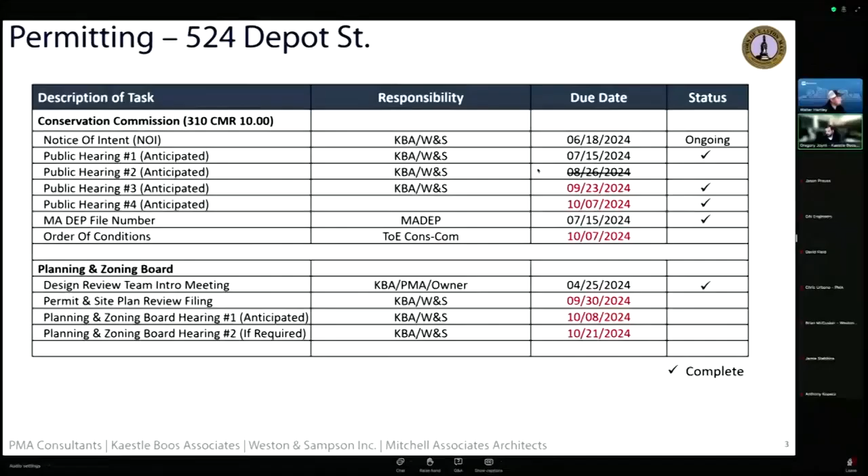Shortly. Again, no real impact to the overall schedule here. We're in and able to go through these items as we can.

And we'll just jump to 321 Main Street. We've just been holding off, making sure we get through Depot Street, which is a very challenging site. 321 Main Street is a little less challenging. No conservation, so that'll go in.

That will need a site plan, just general site plan review. This will cover the stormwater on this portion because we're not going through conservation here, since we're outside the delineated areas. So just a normal site plan review, no special permits, no zoning board of appeals, fairly straightforward. This is a bit simpler in overall project size, scope, and impact, so it should be straightforward and easily addressed.

Just a little update on what happened during the conservation review. This is a similar slide that we showed last month. In the process of reviewing the test pits, we did raise the grades a bit, and after we submitted a revised design, the peer reviewer came back with questions about soil.

The way the design happens with stormwater, there are gradations of soils in the Mass State Stormwater Handbook. That gradation gives you a Rawls rate, basically how fast the water sinks into the ground. The soils here are a little challenging, where there is soil that is either highly compacted or otherwise restricted below it. So the peer reviewer, I think rightfully so, had questions about whether we're really going to achieve the Rawls rate that the stormwater manual says based on the grain classification of the soils.

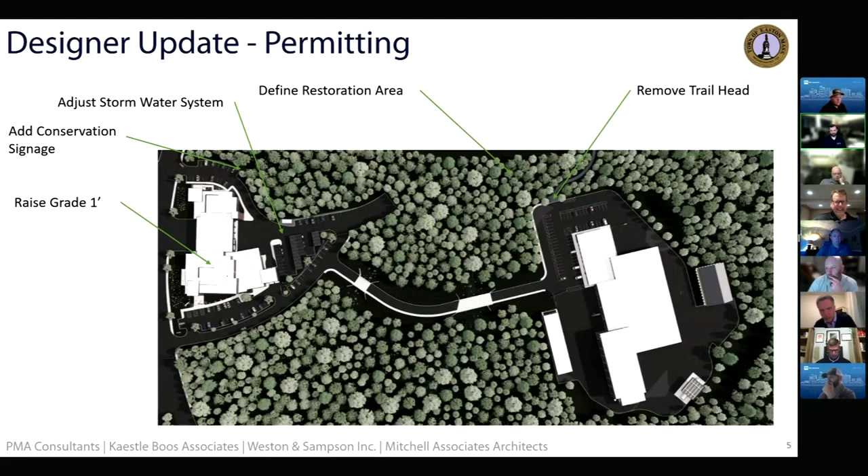All right, well we'll keep going then. In terms of designer work plan, more or less we're on track. We do have a couple items that are still in progress.

Realistically, the due dates that we had on our original work plan were probably a little too aggressive. We came into the estimate for reconciliation just a touch late, so there are a couple things we have to get through and take care of here, but nothing that really impacts the overall project schedule or has any real impact other than just we need to get some documentation done for the work we've completed to date.

Still on track for incorporating any comments on the 80% by that 10/8 date for your next meeting, and for the most part we'll have some good news coming up out of our estimate reconciliation slides in a few.

Greg, are we anticipating early packages or enabling work? No, we're not anticipating early packages here. So those have been NA'd because we're bidding as one single project.

Estimators felt that given the value - and I'll let Walter speak to this a bit more - we were at that size with just public works and public safety that you would potentially miss the smaller contractors because we were too big, and miss the bigger contractors because we were too small. We were ending up in kind of that range where you don't have a lot of qualified general contractors, but also don't have a lot of bigger qualified GC CMs that are willing to take a project at the lower value. So by doing the entire project as one, we think there'll be a better interest with more capable contractors.

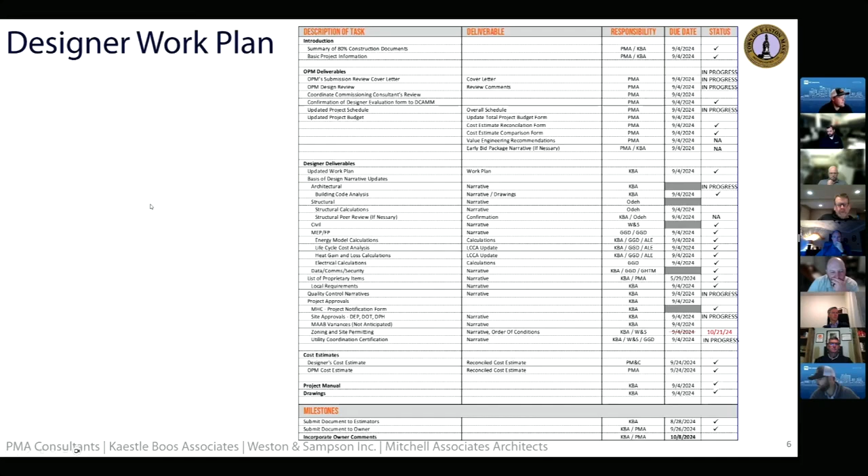So we'll do a quick update. Again, we're primarily focusing here on the public safety building. We will have next month some additional slides for public works and fire substation, but we wanted to bring you up to speed on kind of where we've gotten.

So this was the original image that we kind of talked about as we went into CDs. And this is the update from last month. So we've made some progress since then, and Dan was nice enough to get on a call with Andy and I to go through a couple of these things and get some better feedback or more feedback from him, since he wasn't able to attend a couple of the last meetings.

We appreciate any and all feedback, even if it is critical. So it's important for us to understand the committee's feelings and make sure we respond to any comments. So Dan, feel free to jump in.

I kind of highlighted a couple of areas where we had conversations, and we'll see the response basically in the next slide. But I wanted to just talk through some of the things we were looking at when we sat down last week to review.

This is one area where early on we had decided to do a primarily masonry building to make cost-conscious decisions and really bring that level of sophistication that masonry brings without bringing the level of cost that a lot of metal panel brings.

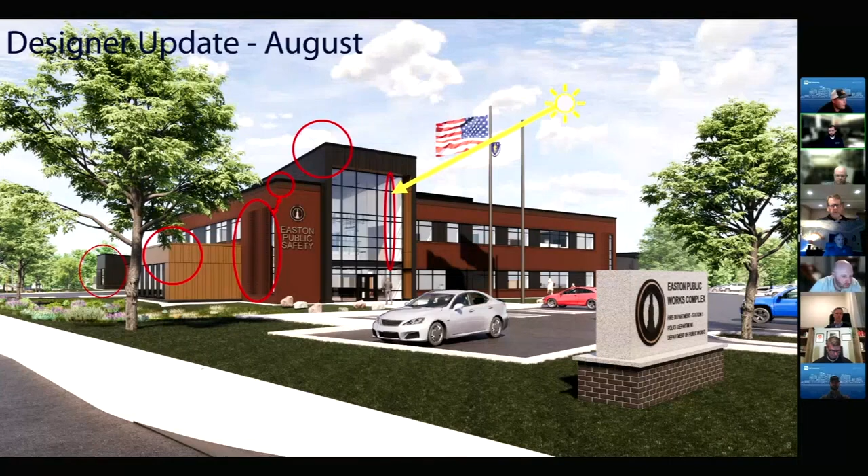And then I think one of the last things was that front mass that is the community room, just how does it relate back to the rest of the building? The main entry is kind of a dark metal panel. The mass of the community room is a kind of wood grain metal panel. So what can we do to make sure they are speaking the same language and interacting in the right way?

So this was the August update, right? This was last month. Oh sorry, so this is this month, losing months here. So you'll start to see what we've done to try to make these things more consistent and a little bit more palatable.

First, that band at the top that really produces our roof edge, right? We've taken and made that a little bit more intricate with some brick, and we're kind of turning the soldier coursing now, making it a little bit more modern, but keeping some detailing there to emphasize the roof edge without it being very traditional.

That area where we had the corbelling next to the window, we've taken that and produced some lines in it. It just made it a little bit more clean and consistent so that it's tying through to the rest of the facade and not just a single element at one spot.

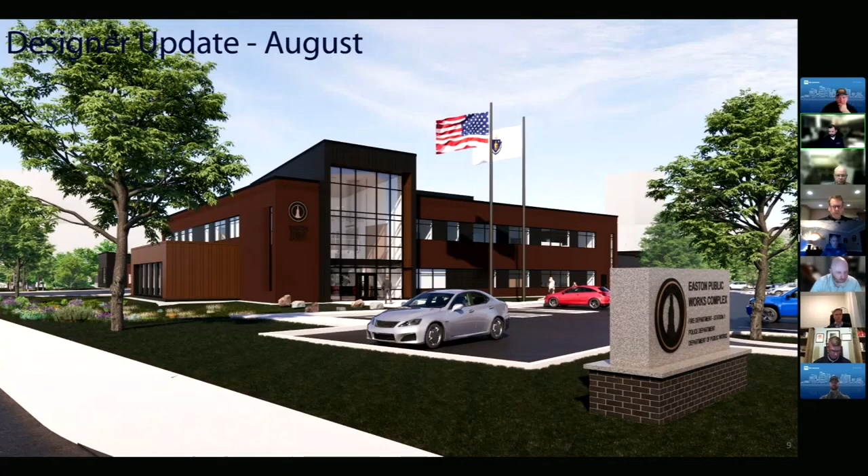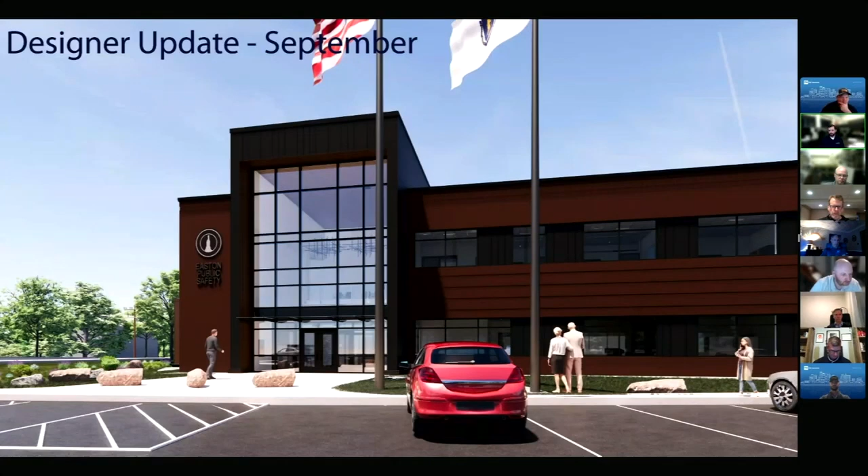We'll just move around a couple of the buildings and go through the same progression in updates, right? So original update last month and then update this month. Again, bringing a couple of those details in the brick around, making sure that we're being modern, but also bringing some interest so the building has some detailing and interest to it.

And Dan, this is the first time you're seeing these, so by all means, feel free to give some feedback. And also on the west facade, right? Is there something we can do to take down that solar glare and the heat gain that we get on that west facade? So an example of what we've done in the past.

Taking and adding some larger mullion caps to the curtain wall, extending that out. On the west facade, you want vertical shading and not horizontal shading. So oftentimes you'll see horizontal sunshades on windows, but on the west facade, we want them vertical, so as the sun comes around, you're blocking the sun out as it comes across the glass.

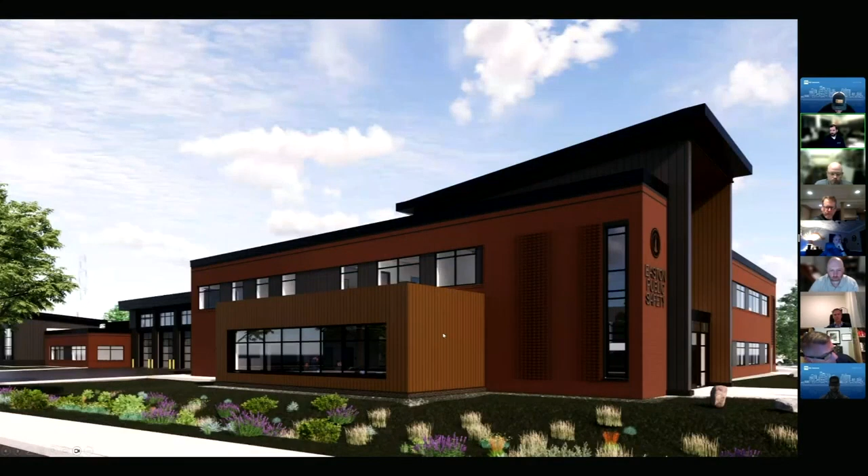So again, original facade - if you look here, a bigger, more traditional roof edge - and we're just slowly refining these things and making it a little cleaner.

And then one thing we did talk about as well is just the large overhang and canopy at the apparatus bay. So we'll take a look at that and see a different option.

One thing that large overhangs do is put in a lot of structure. When you want them - when you want large overhangs on the south side of the building or over a door - they're great. But when they're really tall like this, 30 or so feet above the ground, and on the north side of the building, they don't do a ton of benefit.

So can we reduce the cost of the structure? Can we slim those down? And can we provide a more efficient structure, but also impact the design in a positive way?

So again, same thing - we're going to look at how this ties through. This is the original, this is the update from last month, and this is the update from this month. So the brightness of the image changes a little bit. The materials are all still the same, just the organization of them is slightly different.

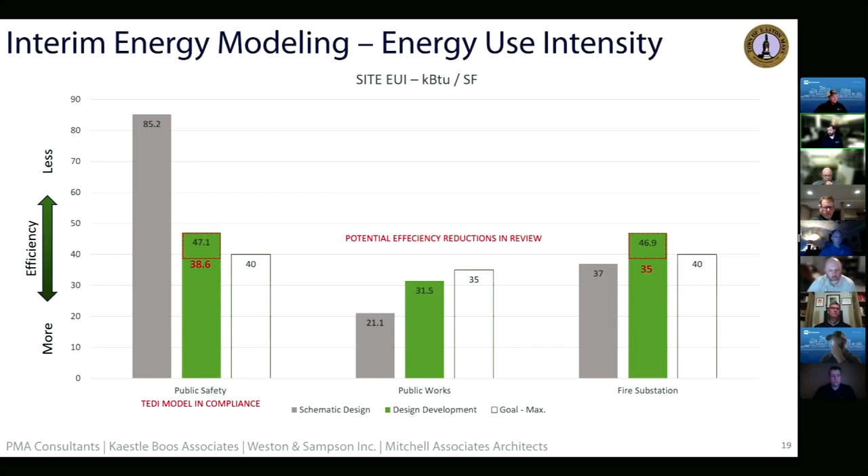And then fire substation, again, we've identified some that we think we can drop 10 or so points, maybe more, based on some things. So last month we showed this slide and we've added more context. Instead of one category, I'm highlighting 2 now on where we think there is potential to save. The first, for public safety, is increasing the fan efficiency of the RTUs. That big green bar is ventilation fans, that's really what's driving a lot of the energy. So if we make the fans more efficient, we can potentially save some energy there.

And the second is this: the original EUI model is still using a code prescriptive lighting density. So we're fine tuning the lighting plan and getting an actual on the lighting controls, getting an actual on the lighting fixtures, and seeing if we can drive that down based on the actuals that we have. Same thing applies to the fire substation, and I'd say even at Public Works, once we get those final lighting designs settled, make sure we get the actual efficiencies of the fixtures, we'll probably see some drop in the EUI for area lights at DPW as well.

But on the fire substation, again, same thing, fan efficiency. Can we make the fans more efficient in the RTUs? Can we improve the controls on a particular RTU? Basically make sure it runs only when it needs to run, just get it a little tighter than it currently is in the sequence of operations. And then 3, that lighting impact. Can we fine tune the lighting, get the watts per square foot down a little bit, in turn save us on the EUI.

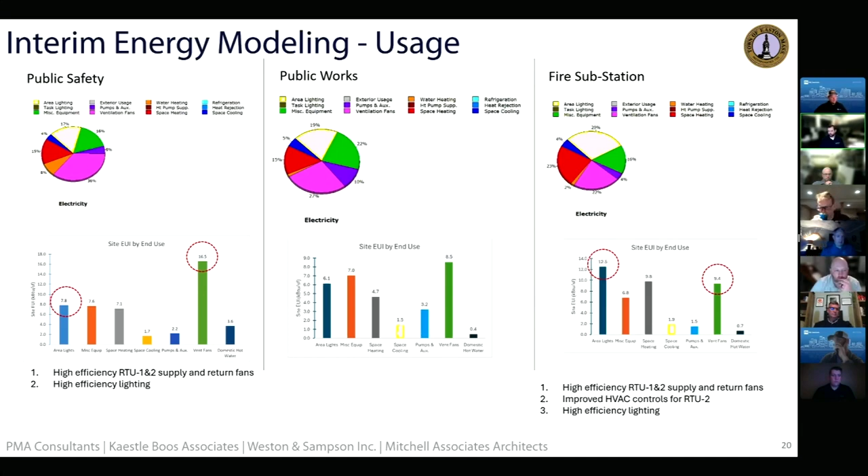Sticking with energy, an update on the geothermal. As we got through the design, not a big surprise, but there was some adjustment, normal part of design. At public safety, we went up a couple of borings. At Public Works, we cut in half the number of borings. That's not unexpected, we knew we had some diversity of loads there. We went with a system that cooled the mechanics bay to offset the diversity, so a little more energy usage, but a lot less borings, so we're bringing the earth back to its median temperature over the course of the year. We're able to get the total borings down.

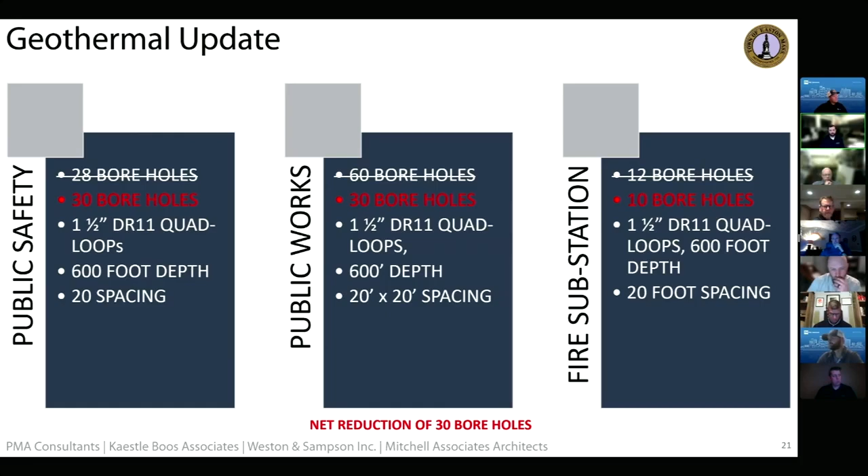And again, fire substation, just fine tuning the design. We're able to remove 2 and probably use the existing test well in that location, so we save a little bit of money there. Net reduction in wells is 30 wells, so that's really a big reduction and a good savings for the project. We needed it because we had some other things that went up, obviously, so getting this fine-tuned is really great.

And so I buried the lead there, Walter, and I'll hand it over to you for this one.

Yeah, no problem. So just a reminder, where we were at the voter approved, which was at schematic design, was 116.74 million, that was construction. So total project budget, 150.53. The PMA team, KBA team, estimators, and engineers all met late last week, worked through a reconciliation on Friday. I'm happy to report that the construction designer estimate of record and the OPM estimate, which is the check estimate, both landed roughly 400,000 below the approved budget, which keeps us right on track. So we are not anticipating any value management at this time. Just so everyone's aware, that is again including that 149 general bid of a single contractor.

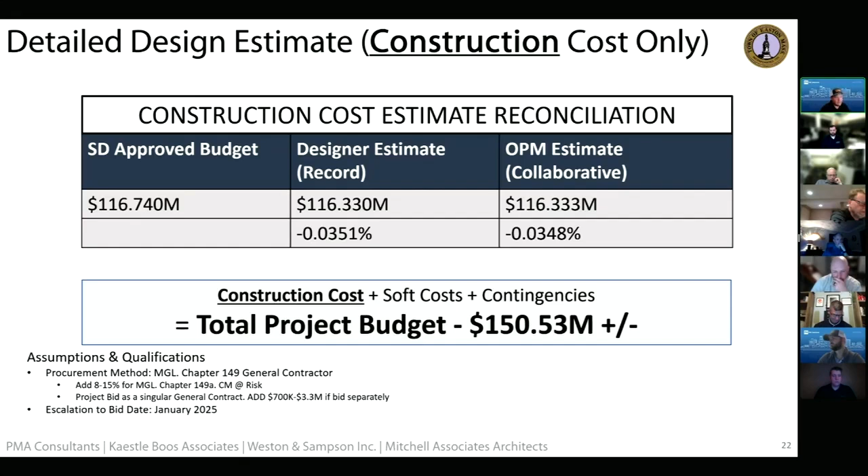One thing to note here is that we are still carrying the 3 alternates, the 2 different canopies. Greg, please remind me of the third one.

So DPW, the canopies are split into 1 and 2. And then the canopies, just kind of bare bones canopies at police, would be the 3rd alternate. So 3 different types of canopies. Those are being carried as the bid alternates at this point in time.

That doesn't mean those are finalized, and it also doesn't mean they couldn't get incorporated right into the project at time of bid. Further discussion will happen through the project team, and also through the MDC, if there are any other alternates that could be removed or incorporated in. But happy to discuss anything estimate reconciliation wise.